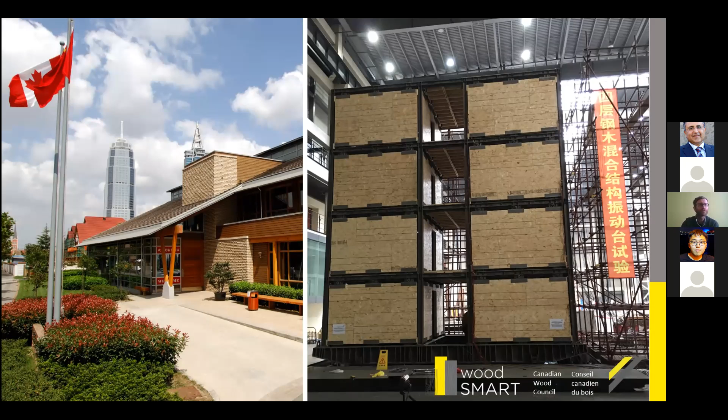I also worked and lived in China for four years, working for the BC government promoting building with wood in China and encouraging the Chinese to buy BC lumber. The picture on the right is a shake table test at Tongji University, just outside Shanghai, a steel structure being tested with an infill light wood frame system and a friction slip fit to dissipate seismic energy, a neat system they were testing there. Today, China has some of the leading edges of wood construction, with beautiful mass timber projects, but also very basic wood construction in the form of bamboo scaffolding just lashed together with wire. Simple but effective.

While I lived in China, I also worked for a company based in Finland that made engineered wood products, so glulam, plywood, and LVL. I became quite familiar with construction practices in Finland and Northern Europe, and I've been fortunate to see wood construction in different parts of the world.

For my talk today, I thought I would start by mentioning current trends in the construction market overall, then talk about some projects in Europe as a snapshot of what's happening there, and then move on to more Canadian projects.

I think it's always good to remind ourselves why we should build with wood. First and foremost, it's a completely renewable and sustainable building material. Wood literally grows on trees. It's remarkable that a sapling just needs some sunlight, water, and nutrients from the soil to grow, and as it grows, it removes carbon dioxide from our atmosphere to help fight climate change. It gives us oxygen to breathe, and in 80 years, just like any other crop, we can harvest it and use it for building material.

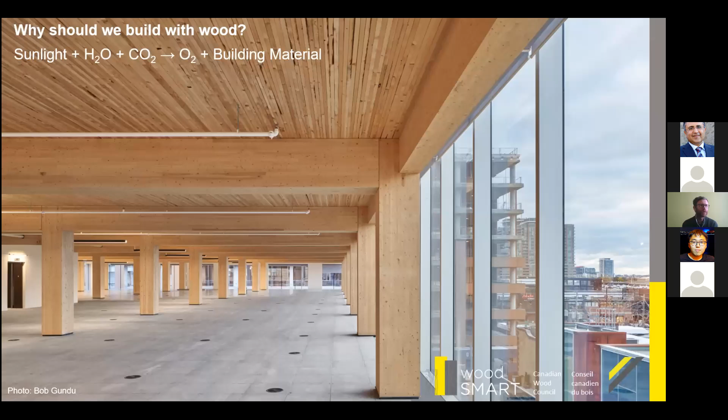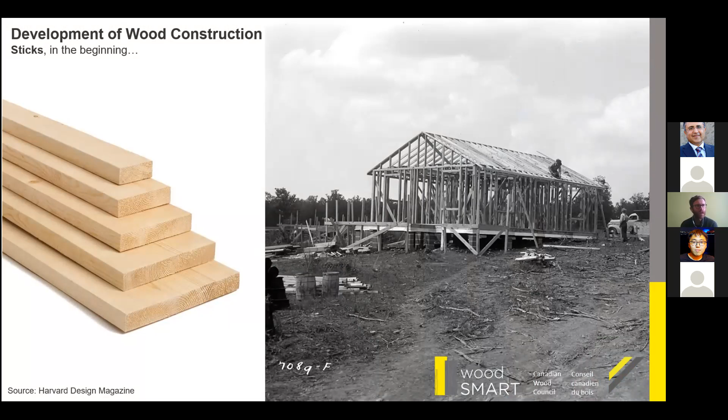Historically, we've built with wood because it was readily available, lightweight, easy to work with, and relatively inexpensive. We started building with sticks, basically dimensional lumber, 2x4s, 2x6s, that type of thing. We used planks for sheathing, and that works reasonably well, but it's a labor-intensive process as it's piece by piece.

Then things advanced a little further from just sticks to panel products like plywood and OSB. This enabled more complex structural systems like shear walls and floor diaphragms. Combined with engineered wood products like I-joists and LVL, it enabled increasingly larger, taller, and better performing wood structures.

Now we've advanced even further to mass timber products. So we've gone from sticks to panels, and now we're on to plates. These are products like cross-laminated timber, glue-laminated timber, dowel-laminated timber, nail-laminated timber, and they can act like large plates, and some can have two-way capacity if needed.

And they're highly processed products where naturally occurring defects in wood, like checks, knots and splits, can be controlled or removed, and the quality of the finished product can really be assured. These are also really large elements that can be made in a factory to almost exact size, and you can CNC the connections in place, and CNC holes for mechanical, electrical, and plumbing routing.

They can be shipped from the factory to a job site and craned into place almost immediately. All of a sudden, you can erect the entire floor of an office building in one week, and you don't have to install formwork or tie rebar or have 150 concrete trucks disturbing the neighborhood. You don't have to wait a while to strip the formwork and then reshore.

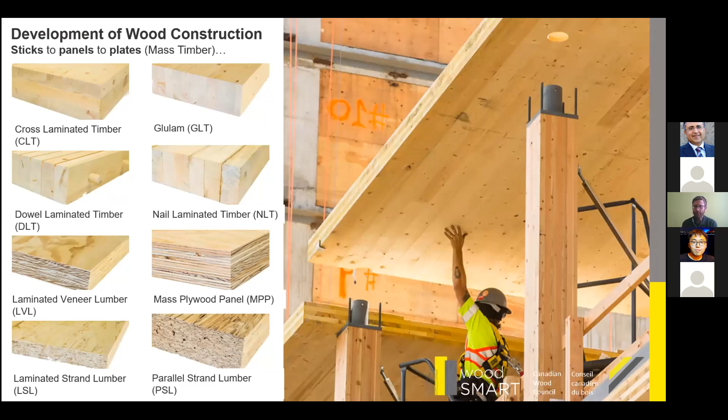So mass timber construction really represents a promising new opportunity for the construction sector. And this is hugely important because productivity in construction is notoriously horrendous.

So this is a chart of most major U.S. industries, the productivity of most major U.S. industries starting just after the Second World War in 1947. You can see productivity, basically the ratio of how much you get out versus how much effort was put in, has exploded in most industries in the past 70 years.

Agriculture has improved almost 16 times. You can think of a farm in the 1940s as looking vastly different than a farm today - leveraging scale through land assembly and automation and bioengineering to increase crop yields.

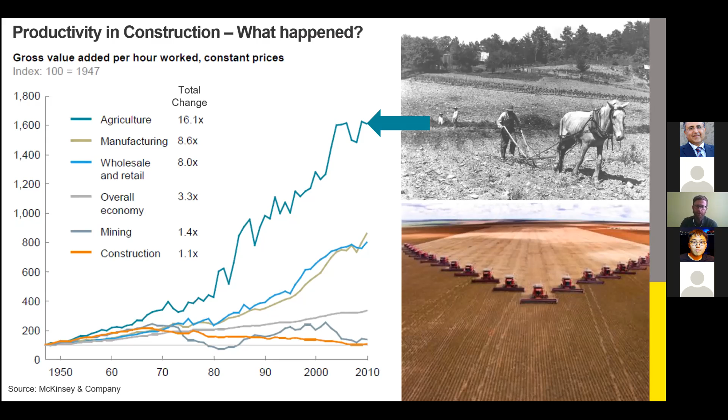Retail likewise has increased 8 times. A Walmart from the 40s looks very different than a Walmart today.

Construction, on the other hand, is the orange line at the bottom. Productivity in construction has increased only 10% in the past 70 years. And most of that was between 1947 and 1970, likely due to the introduction of power tools and equipment to the job site. Since 1970, productivity in construction has actually decreased.

So it's almost embarrassing. The picture at the top right there is from 1833, and it doesn't look too different than any kind of single family home in a subdivision being built today. A loose pile of material is dropped and a bunch of people go about building it one piece at a time. So we can see not much has changed in well over 100 years.

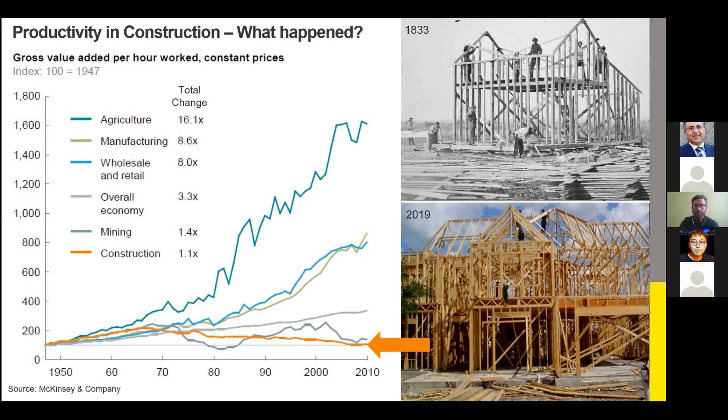Case in point, we can look at the Empire State Building, the planning, design, and construction of which took just 20 months, and the structure itself was erected in just 410 days. The contractor used an assembly line type process with 3,500 workers each day, and they were able to erect the structure at 4.5 stories per week, which would be pretty unheard of today.

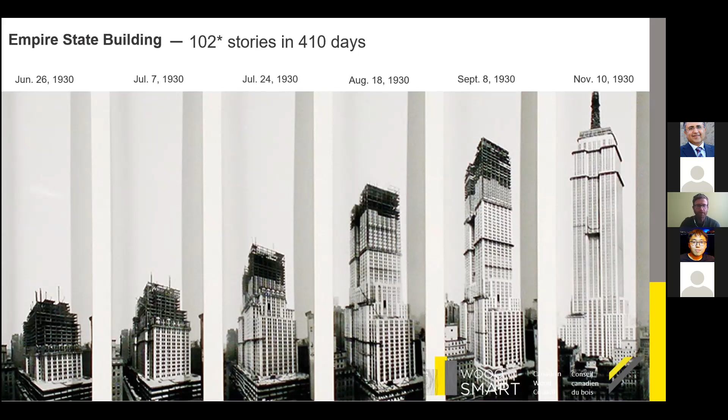There was a human toll - they assume about 5 people lost their lives during the construction. So we've come a long way with worker safety, but in terms of construction efficiency and productivity, we've really lagged behind.

And it's kind of important to remember how slow and stagnant construction is when we look at the overall size of the industry.

So this year, the global construction industry will be worth about $10.3 trillion. If you take the telecom industry and the auto industry, combine them together and multiply that by 4, that's the construction sector. So it's a huge market with a lot of money to be made.

And we know not a lot has changed in the past 100 years to make it more efficient. That means there's huge economic opportunity, especially if you can find a way to build smarter and build faster. What's interesting is that we're seeing tech companies take notice of this vacuum of advancement, because in the tech industry things are constantly changing and improving and evolving, and we get a new iPhone every year. So they can't believe that the construction industry is still doing the same thing they did 100 years ago. And now big tech companies like Google, who have a lot of money and capacity and influence, are getting involved because they see huge economic opportunity in changing the way we build.

And what's really interesting is they recognize wood as the backbone of that change, not just because of its environmental benefits, but because wood lends itself really well to more efficient industrialized construction. So we're seeing companies like Katerra, which is based in Silicon Valley, they want to change construction through technology, where they control every product and every process. Instead of the old approach where designers and builders are in different rooms and nobody really knows what each other's doing, they want to spend a lot of time at the beginning to establish a systems approach. So at the tail end, there's only a few people putting this kit of parts together on site.

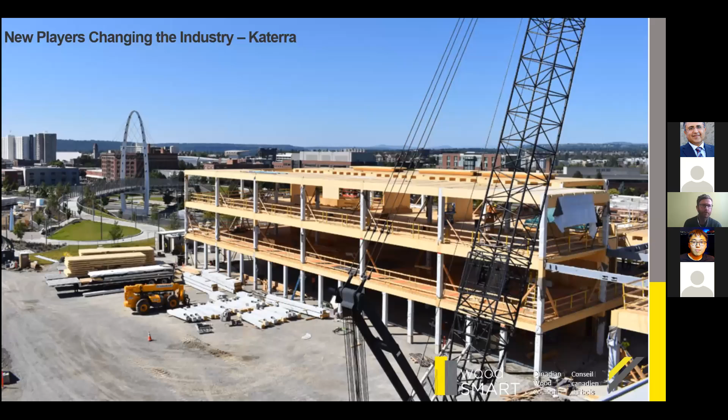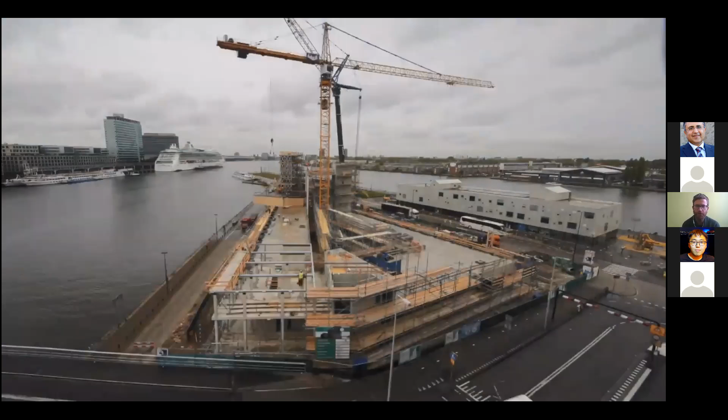And so we see on the horizon a paradigm shift in construction from its current state to a more industrialized process, incorporating the concept of design for manufacture and assembly. A design approach that focuses on the ease of manufacture and the efficiency of assembly, which is used in the auto industry. And wood lends itself really well to this type of construction.

This is Hotel Jakarta in Amsterdam. It's a 9-story luxury hotel that was built out of 176 factory-built CLT modules. They were installed at a rate of about 12 per day, and the structure of this 9-story building took just 2 weeks. So again, that was all CLT modules.

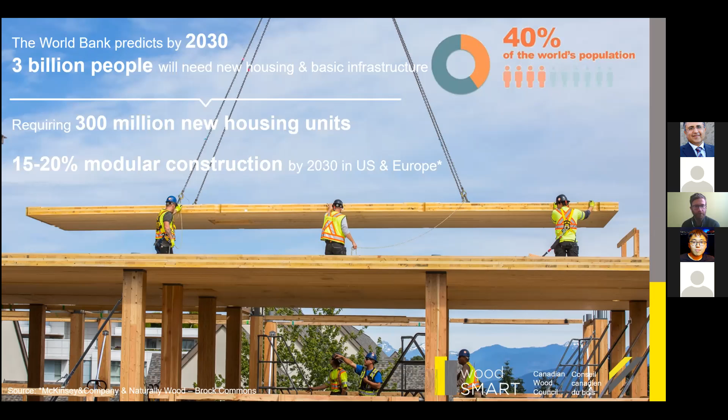I think it's really important that future architects and engineers and builders have knowledge in wood because construction is changing and because we need to build a lot of new infrastructure. The World Bank estimates that we'll need 300 million new housing units in the next 10 years. And to meet this demand, McKinsey & Co., a global consultancy, estimates that 15 to 20% of all construction will need to move to modular or offsite means in the next 10 years. So that's a huge potential opportunity for wood construction, given that it's very desirable in these kinds of applications.

And there's an additional problem that young people aren't going into the construction workforce like they have in previous generations. There's a huge shortage of skilled trades in North America, and this further reduces construction productivity and makes things a lot more costly. The Wall Street Journal recently reported that they estimate about 40% of construction job postings remain unfilled even after about a month and a half. So what's happening is older skilled trades are retiring, and the young people aren't going into those lines of work because they don't see it as a rewarding career path.

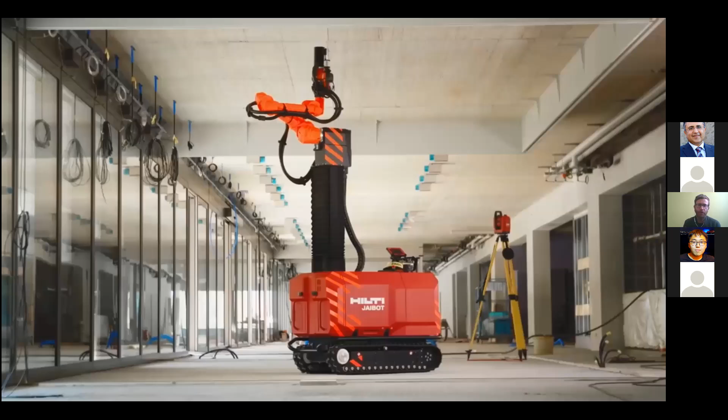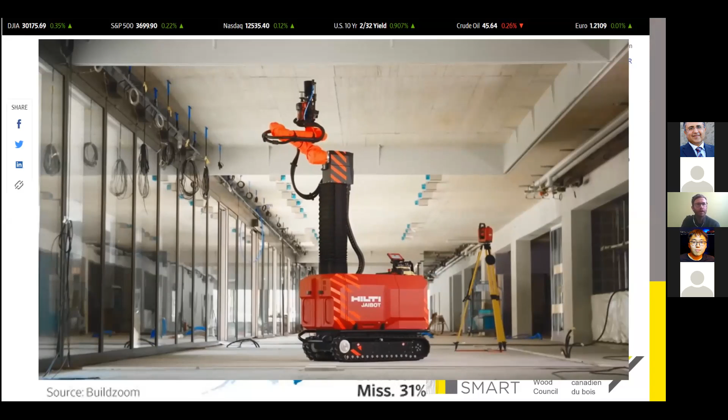And it's gotten so bad that Hilti, which is a multinational construction fastener and equipment company, they've created an autonomous robot to drill and core concrete slabs because there just aren't the workers that want to do that. And it's very costly, so they've created a robot to enable that to be done autonomously.

So one possible solution to this issue is to bring construction off-site and into a factory, basically to create more industrialized processes similar to the automotive industry. And to illustrate how this can happen, I'll give you a snapshot of what's happening now in Northern Europe in wood construction, where a lot of prefabrication has been used over the past couple decades, and it's being improved constantly.

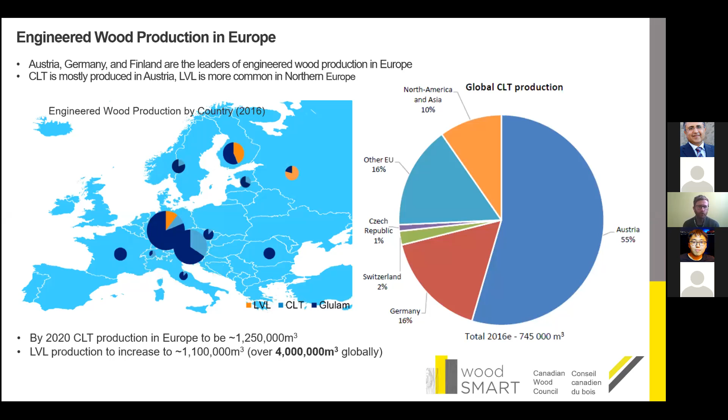When we talk about wood construction in Europe, it's good to know the regional differences. CLT construction is much more common in Southern Europe, Italy, Switzerland, Austria, because that's where it's produced. In Northern Europe, they use a lot more LVL, because that's more commonly produced there. It's good to note there's a lot more LVL produced each year, about 4 times the amount of LVL over glulam or CLT is produced annually.

In Europe, they have 2 different types of LVL. There's standard LVL where all the veneers are in one direction, and this can be used for a beam, a joist, or a column. They also have LVLQ, where 20% of the veneers are perpendicular, and that gives it 2-way capacity, so it can be used as a panel, a shear wall, or a plate.

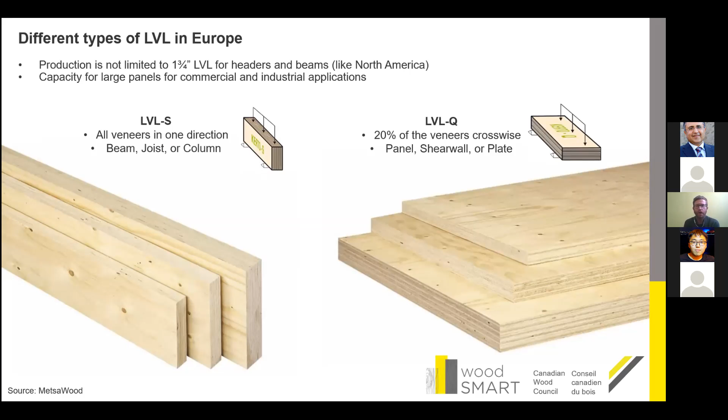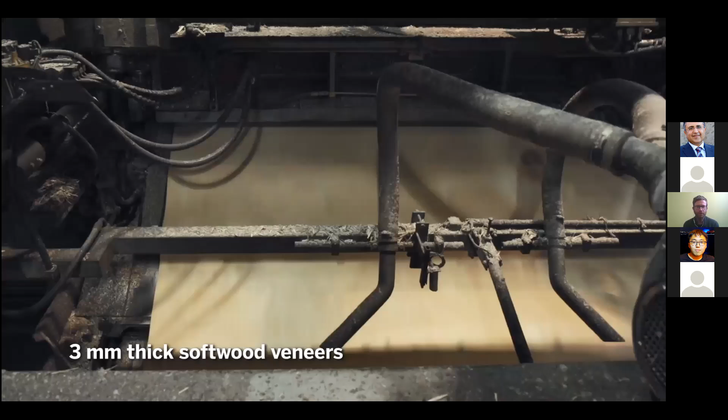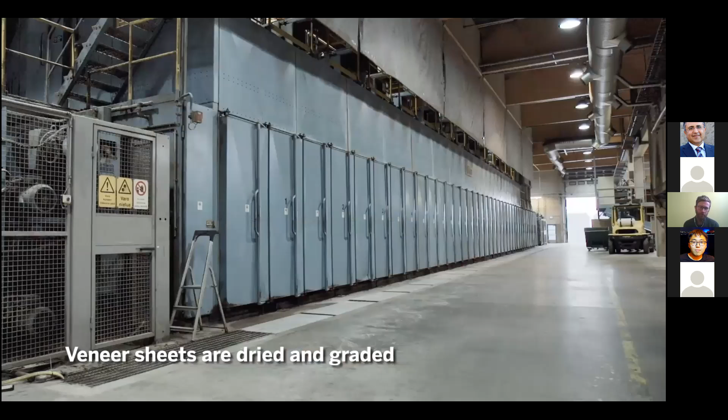Then they dry the veneers down to very low moisture content, so all the shrinkage happens at this point. Then they're also able to grade the veneers, taking a picture of it to look at where the defects are, where the knots are. They can remove those defects and really ensure the quality of each piece of veneer.

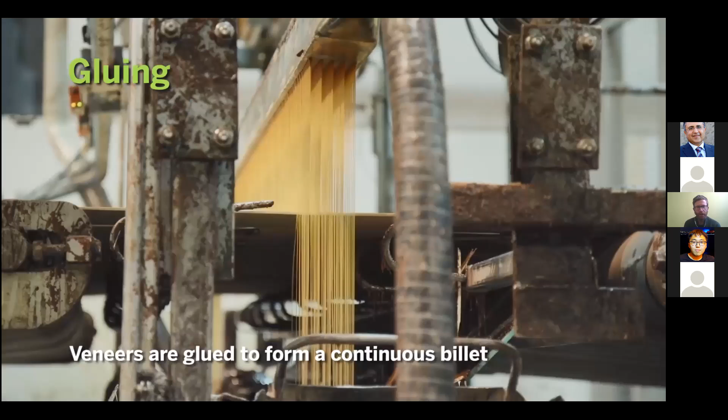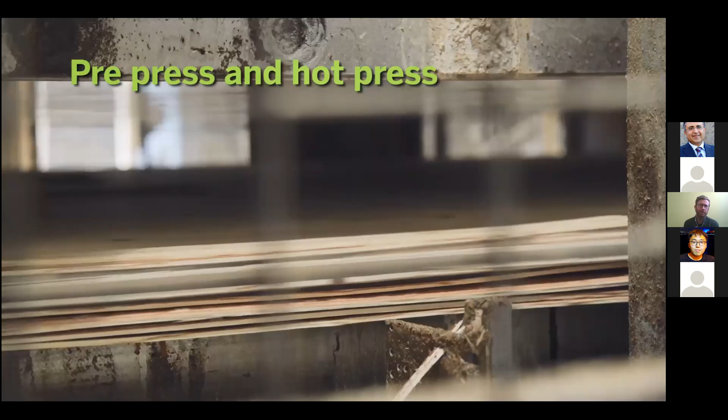Then it goes into a layup process, where they add all the veneers together. They add a phenolic resin, an adhesive applied to each veneer, and then stack them on top of each other to the desired thickness, typically between about 20 to 75 millimeters, forming one continuous billet. They add heat and pressure, and that cures the glue.

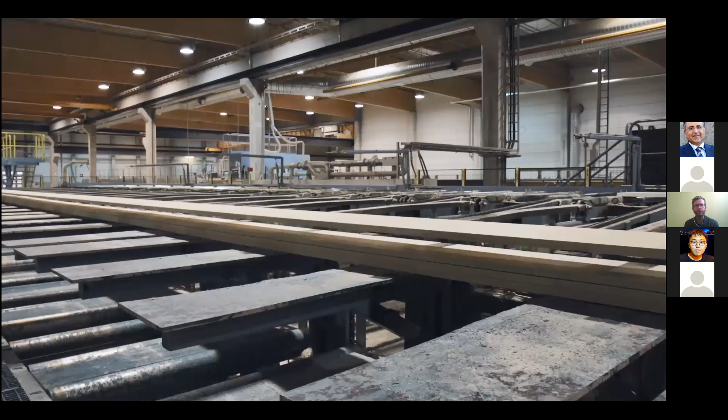When it comes out, you have this huge billet that's a solid, homogeneous piece of wood. From there, they're able to saw it into different widths and lengths, then package it and send it all over the world. This is in Finland, and some of this material could be going as far as Australia, to Australian markets. So it's really a global product.

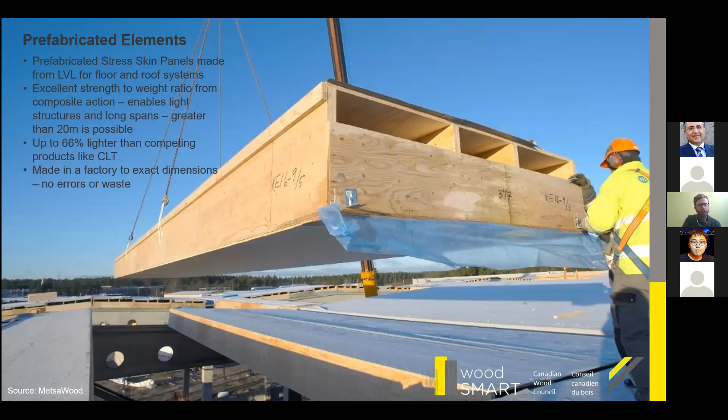Over the past 15 years, prefabricated elements in Northern Europe have become more and more common. One particular example is a stress skin panel element made entirely from LVL components. It's excellent, with really high strength to weight ratio, and you can get very long spans, over 20 meters. It's a lot lighter weight than CLT or concrete. Because it's made in a factory, there's very little waste and very few errors on site.

Stress skin panels have three common configurations. They all start with an LVLQ top panel, basically a compression flange. It's then structurally glued to ribs. There's a shear transfer, and then the ribs go into tension, creating this kind of composite section.

Rib slabs are typically used for uninsulated roofs. Box slabs are used for insulated roofs, where they can add insulation in the factory. An open box slab is typically used for floor systems. So it really comes down to material efficiency, similar to a steel W shape or I-beam. The composite section puts the most material where it's structurally useful, and we know they make I-beams for a reason.

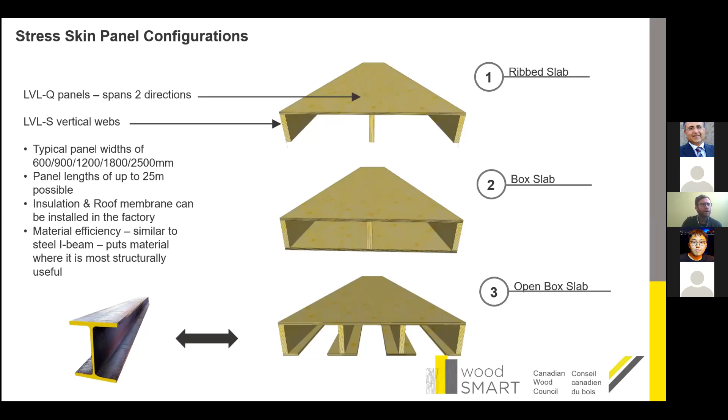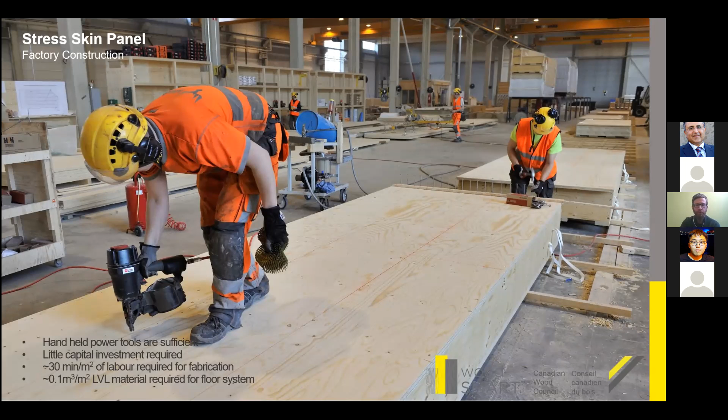This exemplifies how wood is good for offsite and prefabrication because of how lightweight it is, making it easy to get to the job site from the factory. These panels can be made in a factory with very simple hand tools, handheld power tools, and only about 30 minutes per square meter of factory labor is required.

This is a company in Belgium that has made a semi-automated assembly line process to make these stress skin panels.

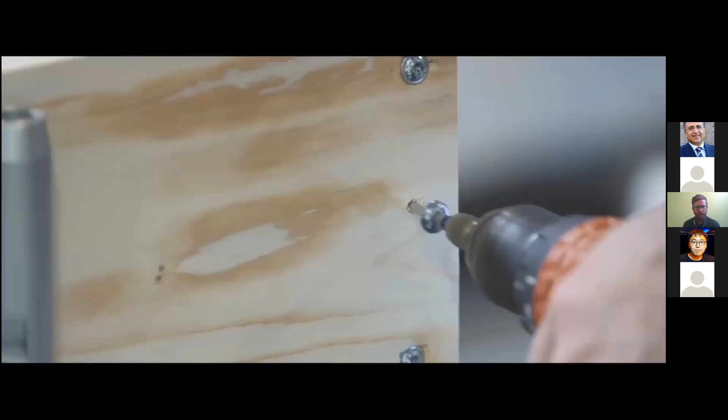They start with a jig and install the ribs. Then they add a polyurethane adhesive that they use to glue the top panel to the ribs, which is a cross-bonded LVL top panel. It's continuous, so that'll go into compression, basically your compression flange. They nail it down, but the nails only provide a clamping force until the glue dries, so the nails provide no shear transfer. The glue is doing all the work once it dries.

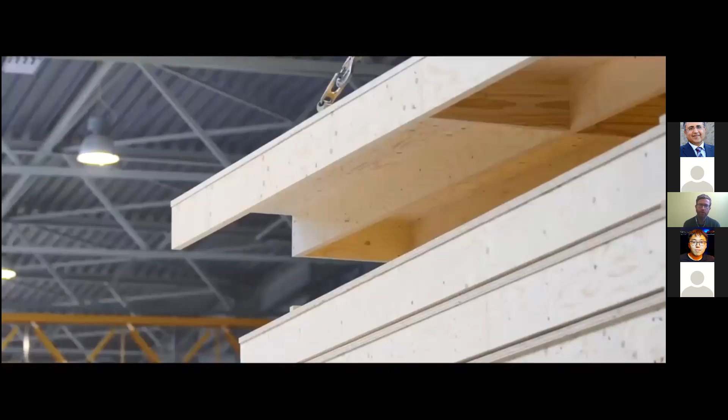So then they install lifting rings so they can handle the panel. You can see how long that is, 20 meters, and it's probably 2.5 meters wide. So it's quite a large element. You can get a lot of these on one truck because again, they're very lightweight, so it's easy to move around and it doesn't cost a lot.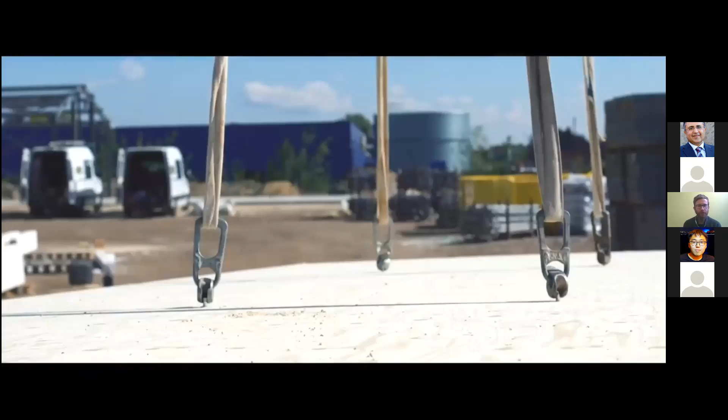So then it arrives on site and they can just crane it right into place. You just have a mobile crane and a couple workers on the roof able to maneuver the panels into place, and then they just screw them together. So you can install 50 square meters in a couple minutes. It's very, very fast, very efficient.

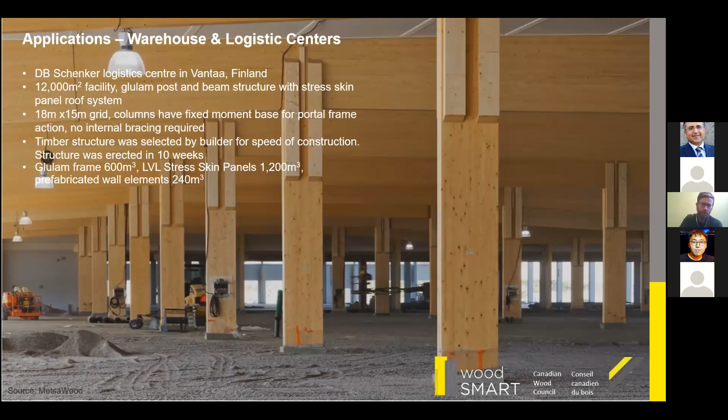They build a lot of warehouses and logistics centers. This one is just outside Helsinki in Finland, about a 12,000 square meter facility. There's a glulam post and beam structure with a stress skin roof system. They designed it this way for speed of construction, so the whole structure was completed and weather tight in just 10 weeks.

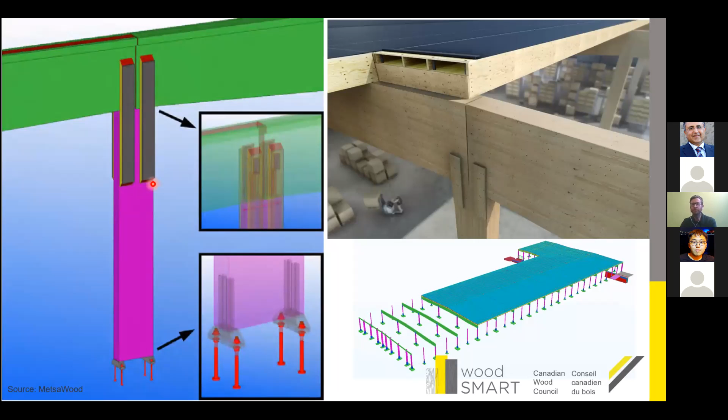And it had an interesting kind of fixed base portal frame system. The glulam columns had a fixed base, and that created a portal frame so they didn't have to have any internal bracing or shear walls.

So moving on to kind of a less glamorous agriculture and industrial buildings, the 3-hinged arch. It turns out that cows are happier in wood structures and they produce more milk, so there's a real trend to make dairy barns out of wood, and they're able to create these 3-hinged arches out of LVL.

The benefit being you can use these trapezoidal sections and have a larger cross section where you have high moment, and taper down to where you have zero moment. The benefit being you get two pieces out of one rectangular panel.

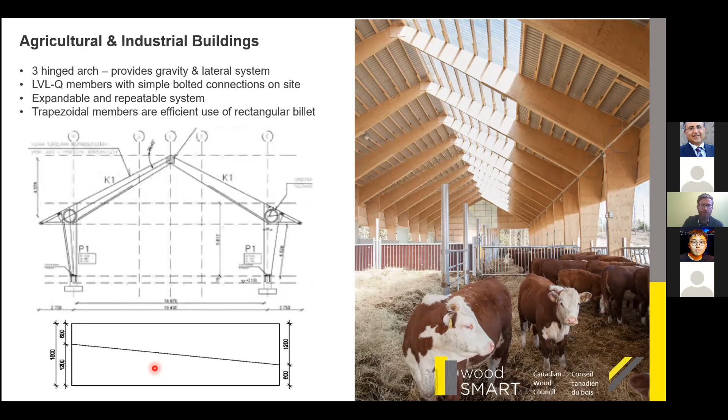And then for the moment connection, or semi-rigid connection, they have this circular bolting pattern. The benefit being that every bolt has the same moment arm, so every bolt's seeing the same force.

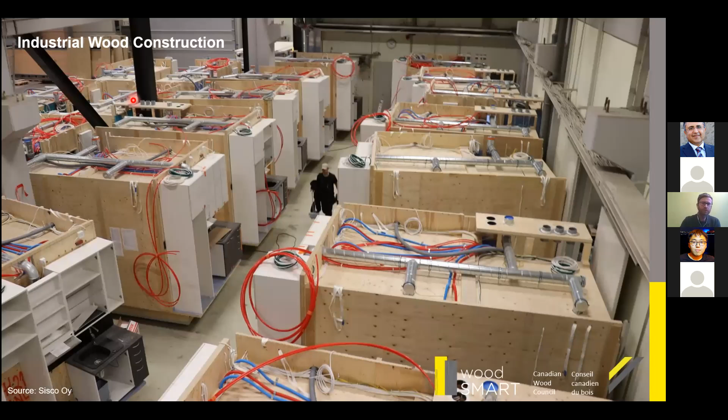So kind of the next step of industrialized construction is to not just make ready-made elements in the factory, but completely finished modules. This is a company again in Finland called Sisco, and they build basically apartment buildings out of factory-built modules.

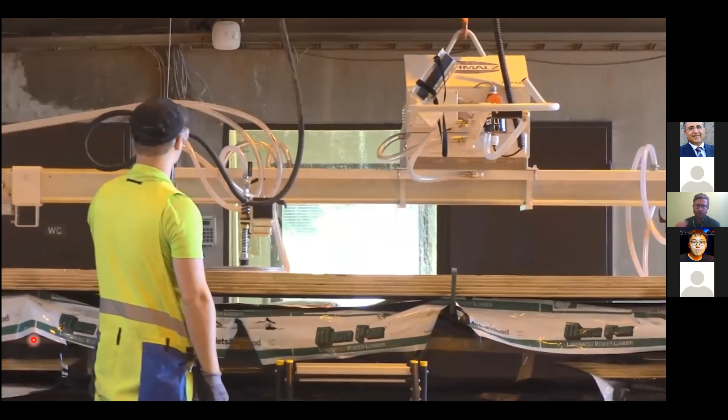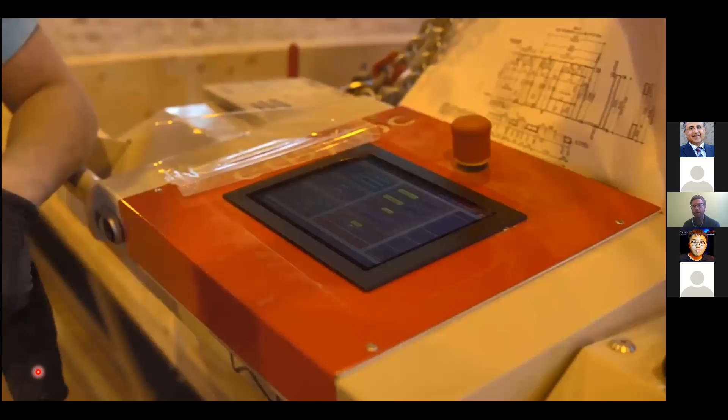They're using entirely LVL for these modules. They use LVL basically because it's stronger than dimensional lumber, and it also has much higher tolerances. So every piece is going to be the same width, same thickness, not warped or twisted, so the machinery can accept it and it doesn't cause problems.

So here they're making the wall elements. You can see very thick, very deep wall elements to get a high level of thermal insulation.

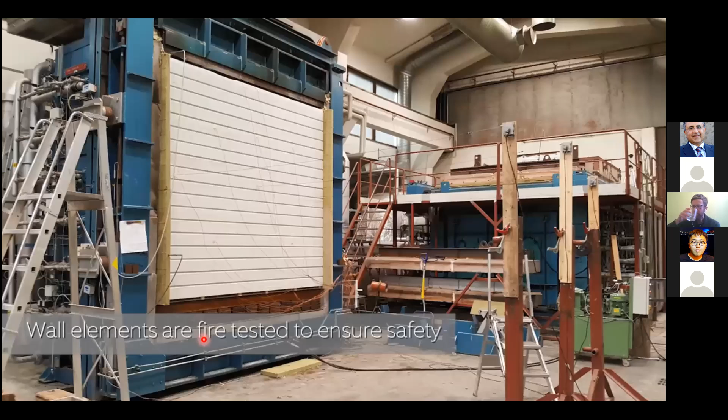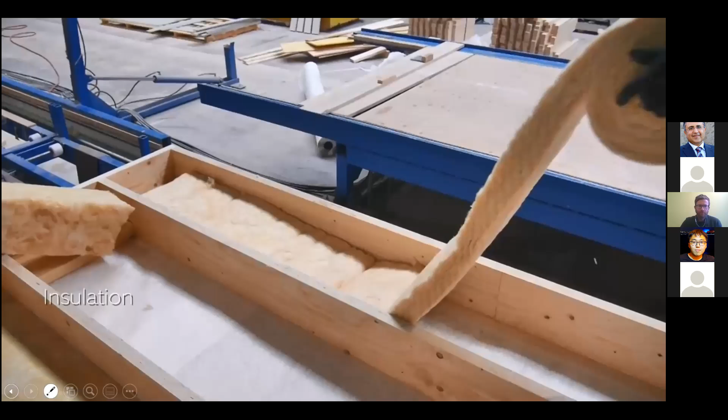And so then they add a stress skin panel floor system. Here it's kind of a more manual process - you can see them applying the glue there and installing the top panel.

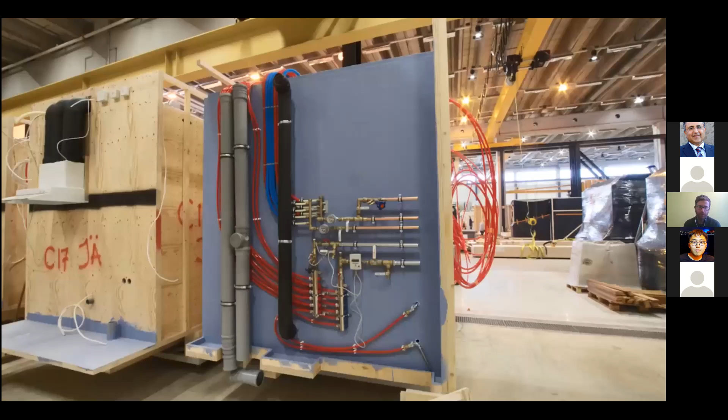And so then they build these bathroom pods. Again, all the mechanical, electrical, plumbing is done in the factory, so it's plug and play on site. You can see just the level of finish - they even do the waterproofing and install the tiles in the bathroom and kitchen.

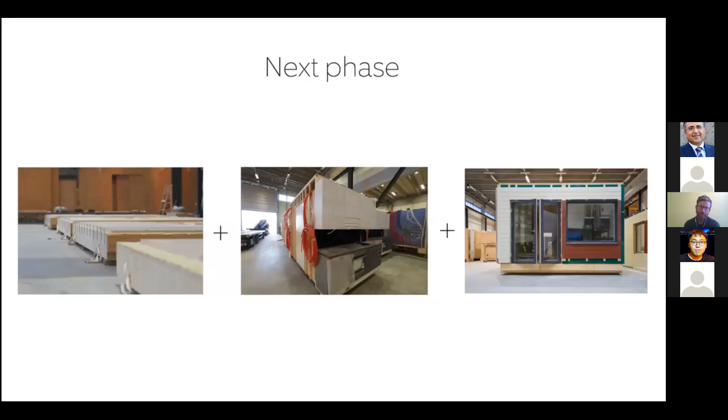And so this is all done in the factory. It's about 6 days in a factory to build one module. And then you can see them bringing all the pieces together, so all the prefabricated elements.

And they even installed the drywall and all the cabinetry, even the appliances. So then it gets put on a truck - each module gets put on a truck and delivered to the job site.

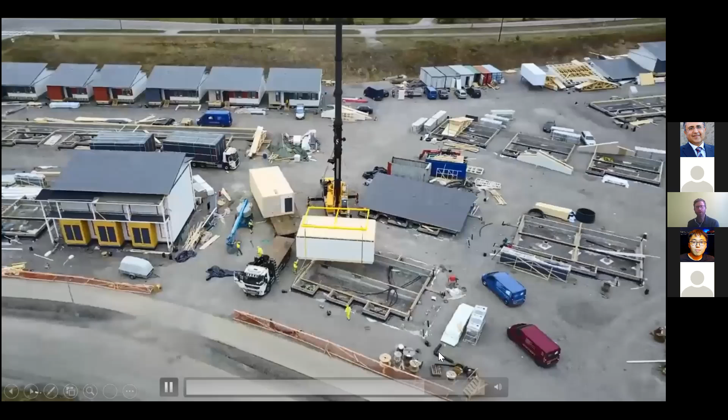And they basically have concrete foundations waiting, and the modules are craned into place and bolted together. Again, all the services are plug and play. So basically, it takes 6 days in a factory to build, and then 1 day on site to install.

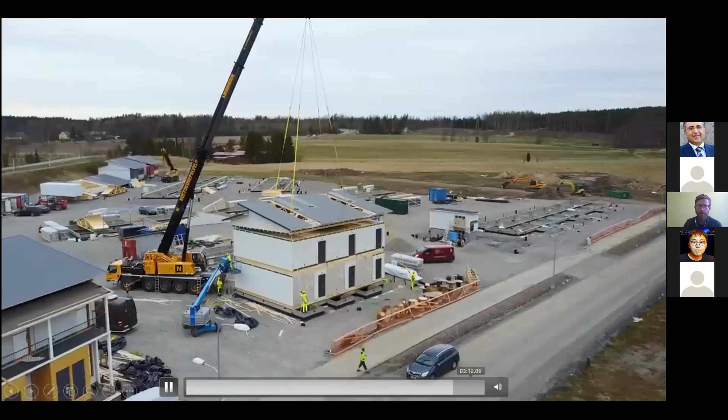And then it's occupied after 1 month. So it's a very fast, very efficient construction process.

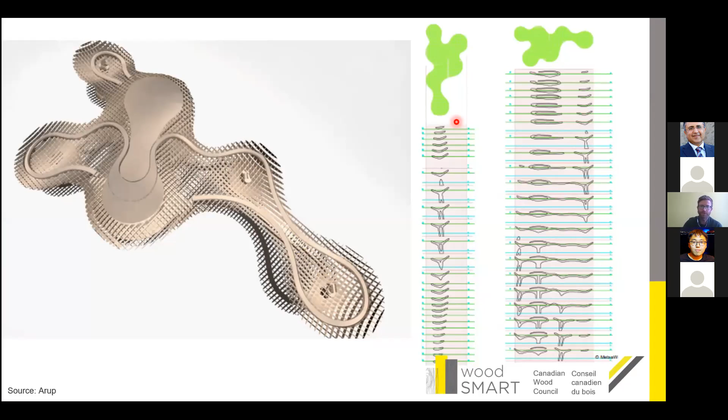It's not just a sculpture; it's actually a public space. There are bars and restaurants on top, and you can actually go and there's a pathway on top of the structure. It's made up of an orthogonal grid of about 1.5 meters by 1.5 meters, in two directions. No two pieces are alike, so there are 3,400 different elements.

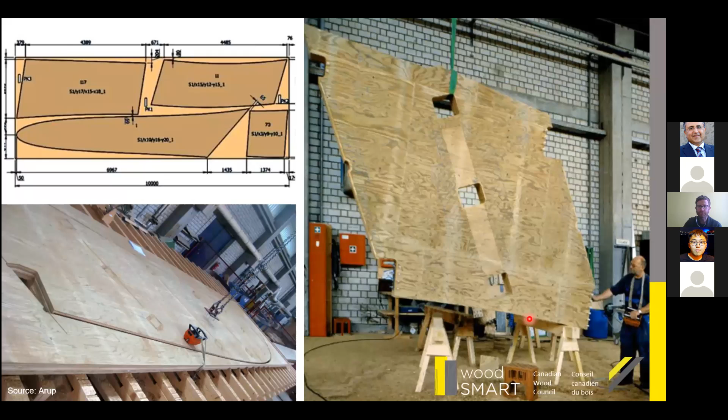Again, they used cross-bonded LVL. They used a CNC robot to cut the very unique elements out of a rectangular sheet, so you could get multiple pieces from one sheet. Just for scale, you can see a worker here operating a crane, showing the relative size of the piece—they're quite large elements.

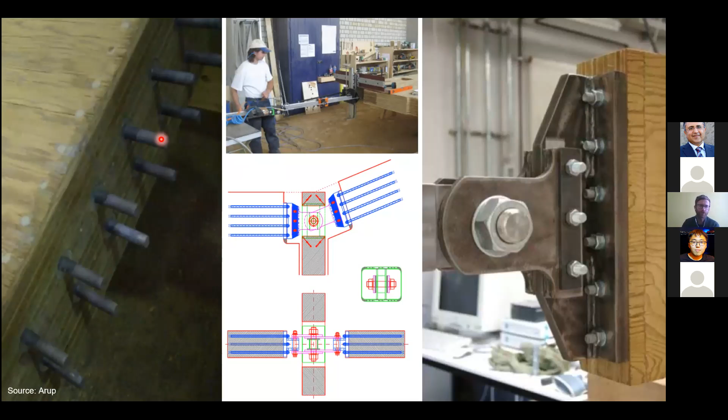They created a neat connection system. Because the pieces are intersecting, they had to create a kind of moment connection, so they drilled and epoxied in threaded rod that goes in about 2.5 meters. So it's a very strong connection. They've coated it in a polyurethane adhesive or coating to protect it from the elements. It's a permanent structure with about a 75-year service life, so you have to protect it from UV and moisture damage.

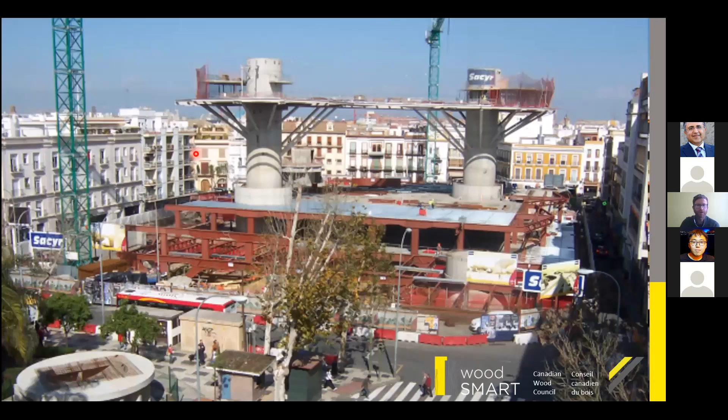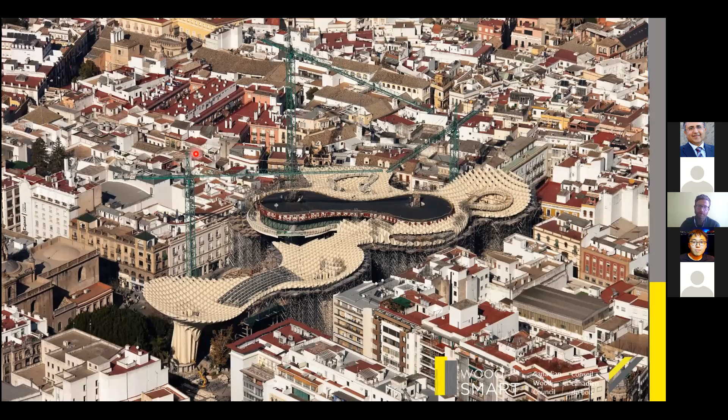This is the construction sequence. The two main supporting columns are reinforced concrete. You can see them craning in some elements here, showing that grid work, the curvilinear system. Just for scale against a city block, it's quite a large structure in the finished project.

About 100 years ago, we built a lot of what's called brick and beam buildings—a masonry exterior with a heavy timber post and beam interior structural system. In Toronto alone, there are about 40 examples, ranging from 5 to 8 stories. Not only have these buildings performed really well over the past 100 years, but they're the most sought-after office space, not just because of downtown locations, but because people really like working and living in wood environments.

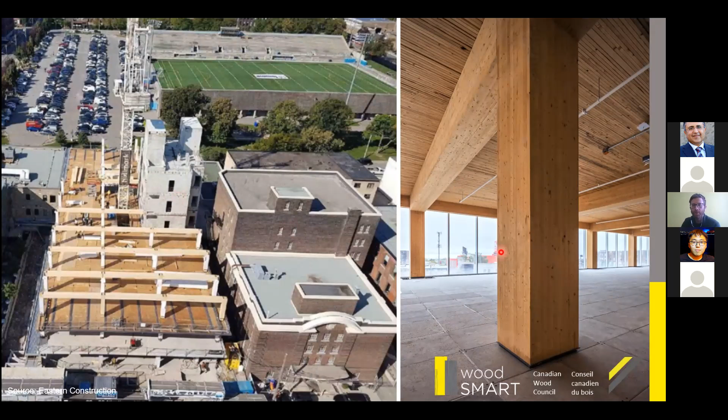You can see it going up. It's a glulam post and beam structure with an NLT deck. It's a 5-story building, but unfortunately it has to have a non-combustible exit core, just because that's what's stipulated in the Ontario Building Code. But you can see the finished product—it's quite a nice office space.

Similarly, there's a 6-story office just outside Montreal called Synergia Complex. Again, it's a glulam post and beam structure with glulam chevron braces and everything. They've left as much of the wood exposed to view as possible. It has a GLT, or glulam timber deck, which is basically just like a glulam beam but on its side, working in the weak axis.

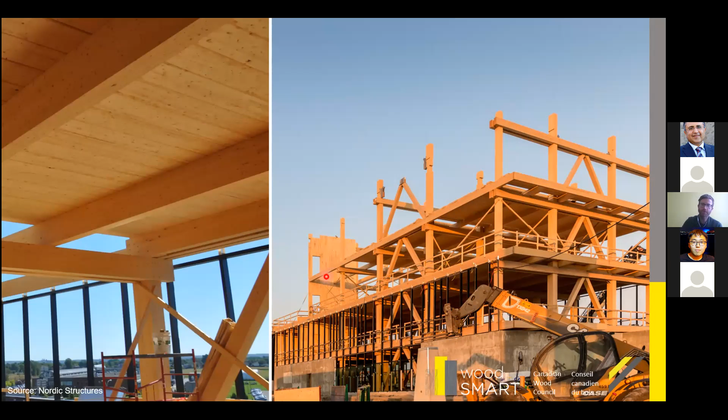You can see the lateral system is a chevron bracing, and the elevator core was actually CLT for this project. This is the bottom story, the braced frame. I thought this is a neat connection—they're transferring lateral forces from the brace above into the horizontal beam here. This steel connection is going into bearing against the wood. They don't rely on bolts because it's too ductile; they want a nice stiff connection there.

Because Montreal has quite high seismic forces, they've used capacity design—they want ductility, so they've used these really narrow steel pins. Basically, in an earthquake, the steel pin will deform and absorb the energy of the earthquake. You can see they've left a gap here purposely so that the brace doesn't go into bearing, because they want those pins to engage and deform. They don't want the wood bearing against the steel, because it wouldn't be ductile.

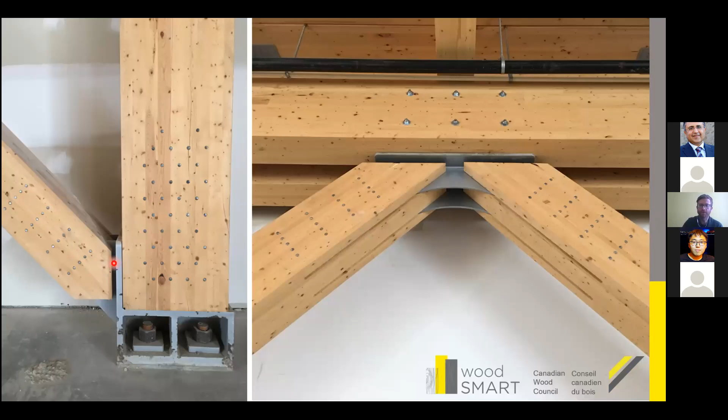So the finished product there, it's quite nice. It's often difficult to quantify the benefits that people are happier, healthier, and more productive in wood environments. But an easy litmus test is to just ask yourself: what office space would you prefer to work in?

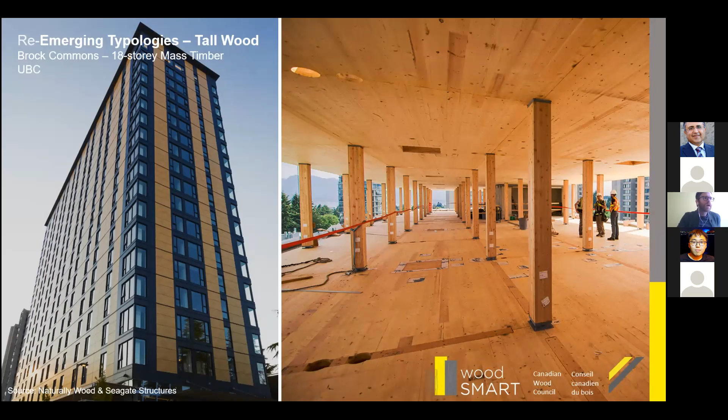I'll move along here. One more reemerging trend is tall wood buildings. This is Brock Commons, an 18-story student residence at UBC, built by a crew of 9 people in just 45 days.

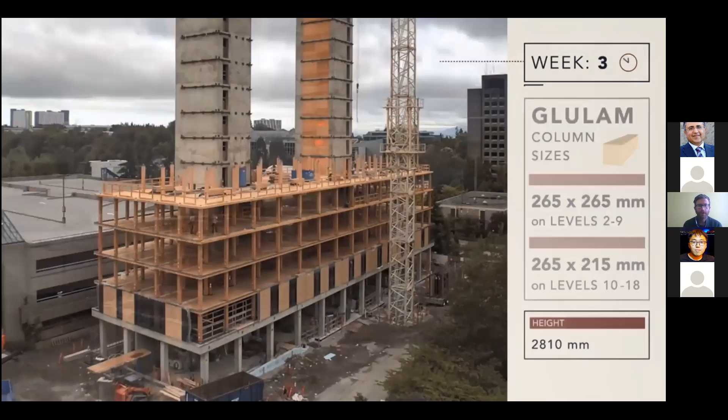It's a CLT point supported on glulam columns, so the CLT is working in 2 directions. All the elements arrived on site with the connections already installed, all CNC'd in, ready to go, and craned directly from the truck right into place. Everything was cut perfectly, so there's no cutting on site, no waste or errors, so it's very efficient.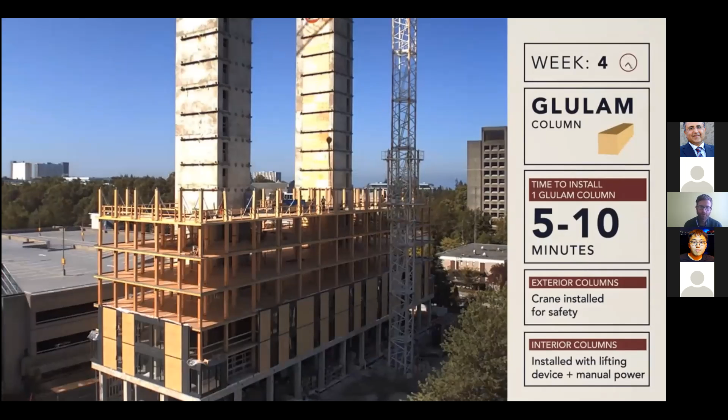So it just goes together like a big Lego. The project uses reinforced concrete as well, just because it's 18 stories tall.

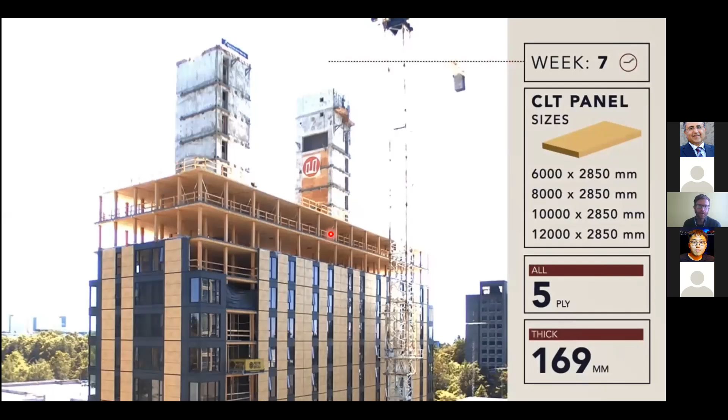Again, the benefit of prefabrication and offsite construction is that there's no guesswork on site. Everything comes cut to exact size, and it just gets craned into place immediately.

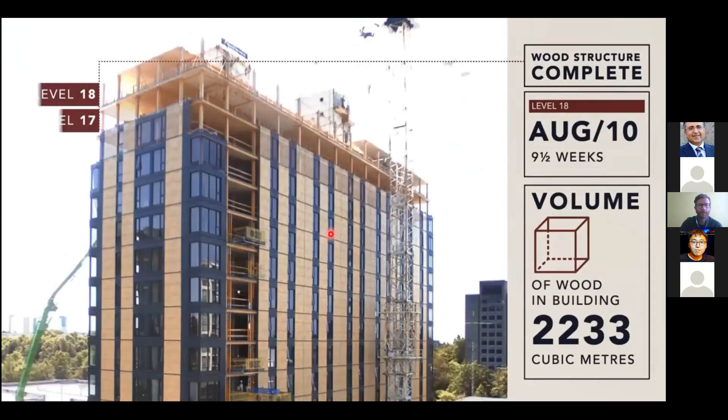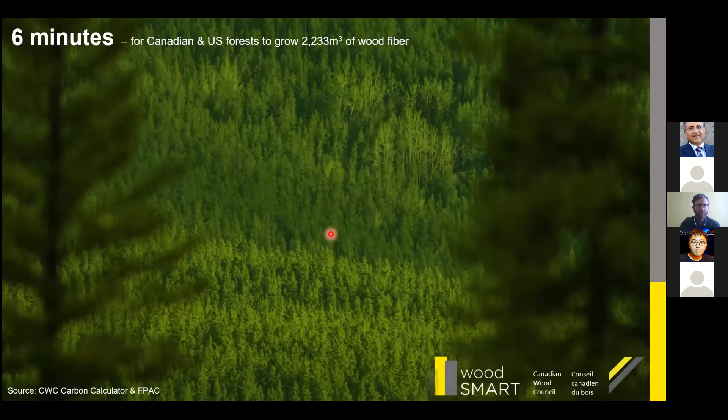Inevitably people say, well, if we build more buildings out of wood, we're gonna run out of trees, and the answer is actually no. The wood fiber to build Brock Commons was grown in our forests in just 6 minutes, so we're not going to run out of trees. Canada has a significant amount of forest land that's very well protected with strong regulations. For every tree that's cut down, about 4 are replanted. We actually lose far more of our forests to fire and insect attack than we do to harvesting. Less than half a percent of our forests in Canada are harvested annually, whereas almost 5.5% are lost to forest fire and insect attack.

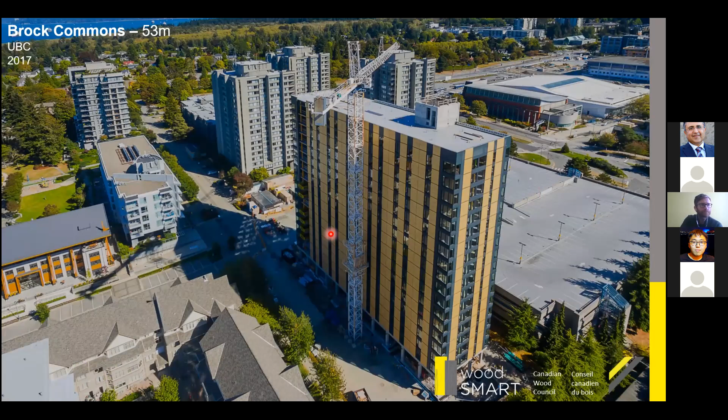So at 53 meters, Brock Commons is pretty impressive, and a really good example of tall wood construction and prefabrication. But it actually wasn't the tallest wood structure in the world. That was the Yingxian Pagoda in Shanxi province, China, which is 67 meters tall, and for about 900 years it survived quite beautifully, despite fires and severe earthquakes.

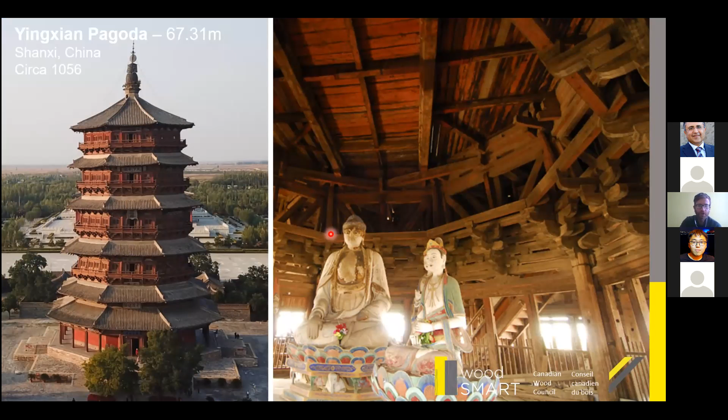It was the world's tallest wood structure until just last year, when a hotel was completed in Norway at 85 meters tall. This is the Mjøstårnet Tower, a hotel and private condo. Unlike Brock Commons, it's an all-wood lateral system, with a CLT core and glulam super bracing on the exterior, so there's no concrete core for this project.

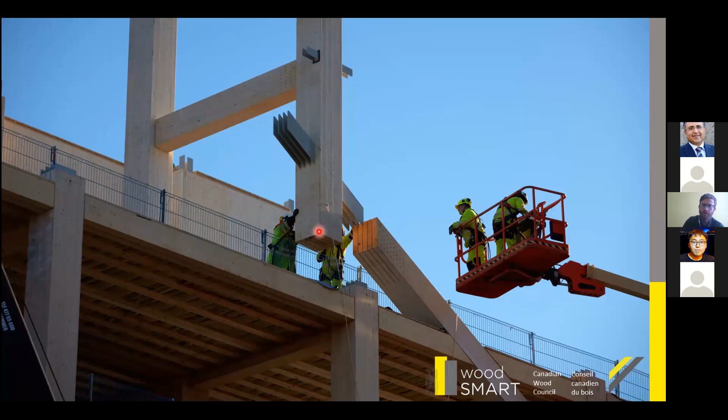You can see just how large the columns are - these are 2 foot by 2 foot in dimension. Very, very large components. You can see these frames; these are 4-story tall frames being assembled together on site and then craned into place. It's at the edge of a very large lake in Norway.

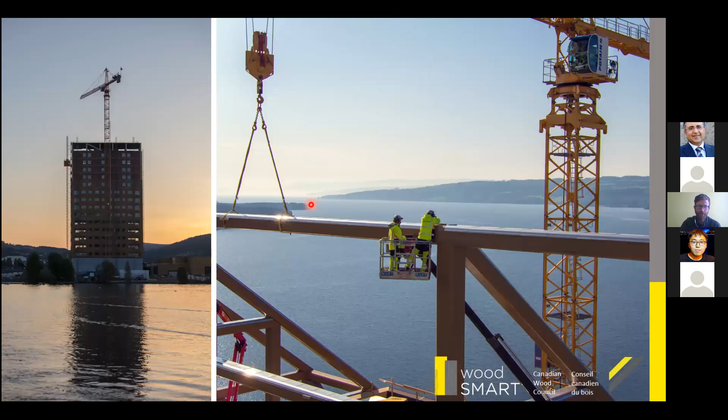Again, the corner columns are just huge - these are 2 foot by 5 feet in dimension, and they've left the super bracing kind of exposed in the unit, so you can see it to view.

Here's just a quick time lapse. You can see the frames going up 4 stories at a time, and then they infill the floors afterwards, followed by the super bracing. So it's very efficient construction sequencing, and the building enclosure goes up not too far behind it to protect the wood from the weather.

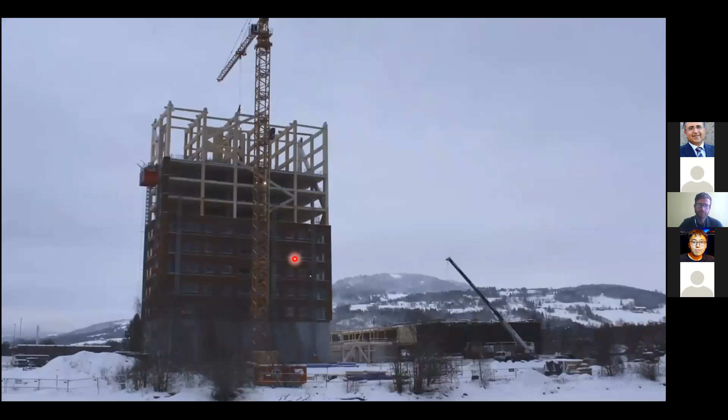I'll skip along here. This is the last project I'll talk about, and it's one of my favorites. It's in China, the Qingdao Pearl Visitor Center, and it exemplifies that prefabrication and wood structures don't have to be rectangular boxes - they can actually take quite unique shapes.

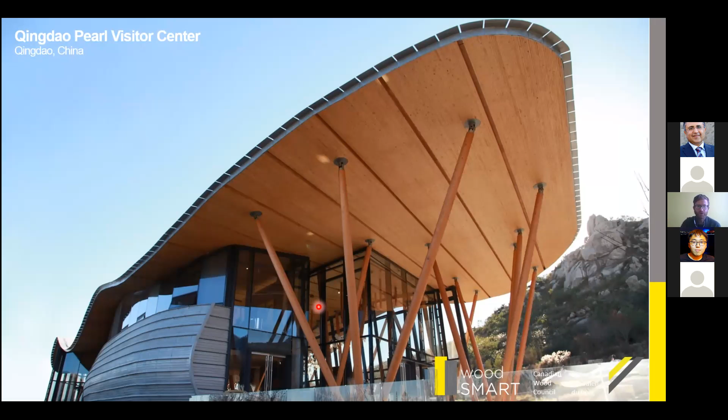This is an NLT, or nail laminated timber structure, supported on glulam columns. You can see these inclined glulam columns that take gravity and lateral loads because they're inclined, creating a frame system. The roof is these NLT panels reinforced with a king post cable truss system.

And you can see the roof takes this kind of freeform shape, and that's created because the NLT, each of this is 2x8s that are just nailed together a fraction of a degree off. And you create this kind of really unique form.

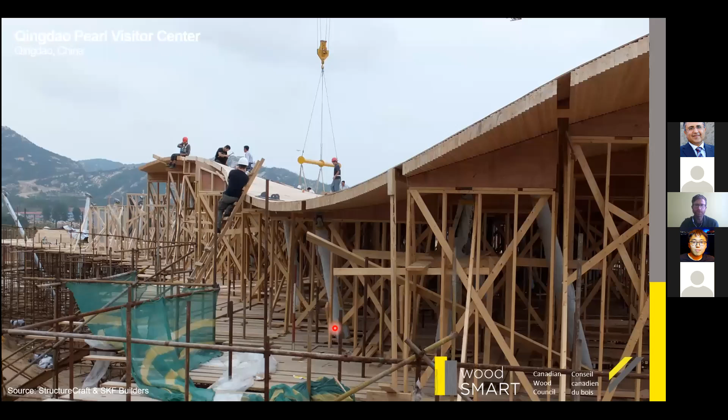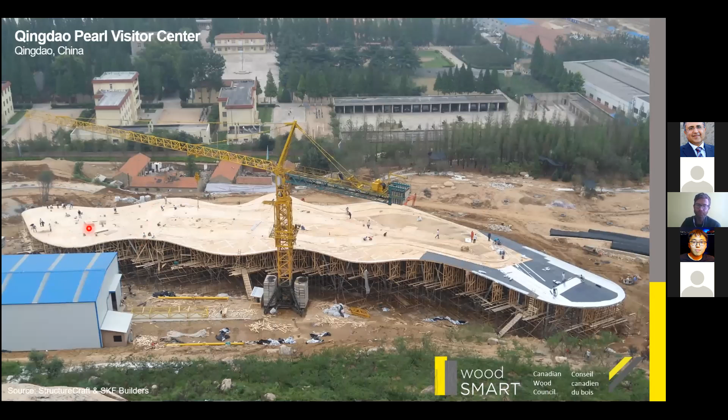So these panels were made in a factory on site and then just craned into place. So you can see the roof from above. Here's the factory where they built the panels, and they just crane these about 10 feet wide, 60 foot long panels into place in the finished product there.